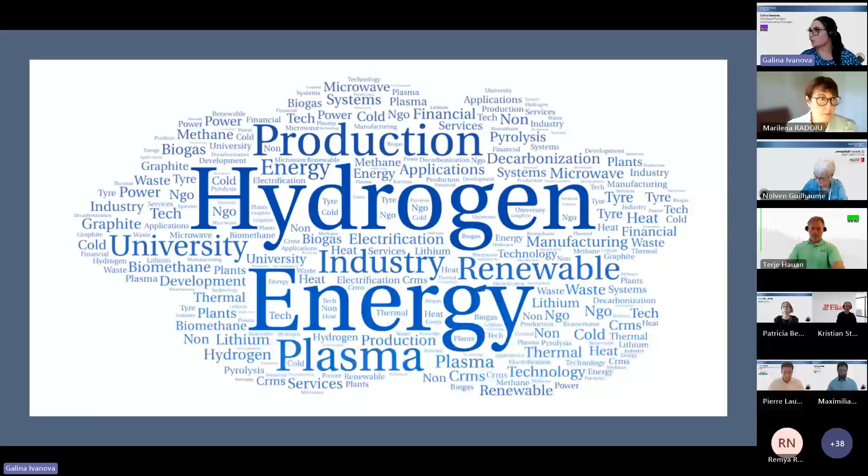In the registration form, we asked you to fill in your sector. So I created just a word cloud showing where people joining this webinar work in. So welcome to everybody. It's a joint effort. So we are happy to welcome people from actually all over the world. A lot of people from Europe, of course, because we are European projects, but also a lot of interest from Asia and United States, Canada, and South America. Which is very, very nice. We are very happy with this.

A quick look at the agenda. We will present the three projects, ColdSpark, Titan and Storming. We are all dealing with methane splitting in some or other way. We have Maximilian Kuhn from Hydrogen Europe who will set the scene. Thank you very much, Maximilian, for taking this responsibility and joining us today. And then we will have maybe the most interesting part with representatives of Michelin and Elkem, who will tell us why industry partners are interested in our projects. And we will finish with a panel discussion where we are also quite open to your questions too.

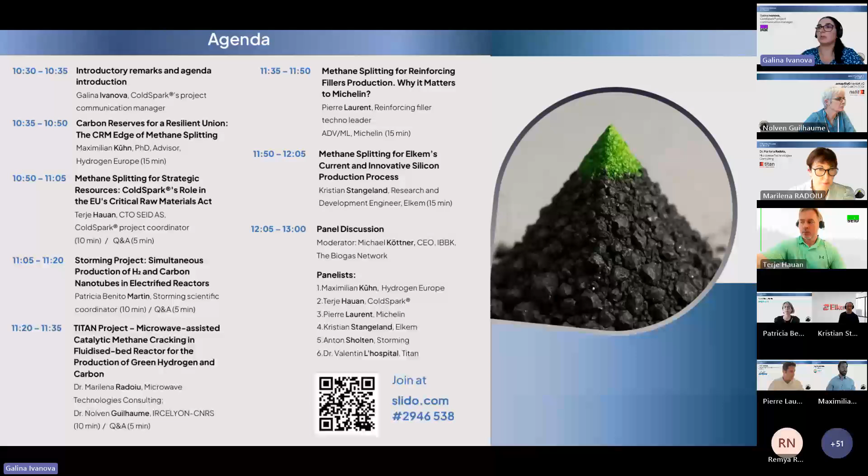And going back to the agenda, I give the floor to Maximilian, who will share the screen and tell us more about the carbon reserves for a resilient union. Thank you all.

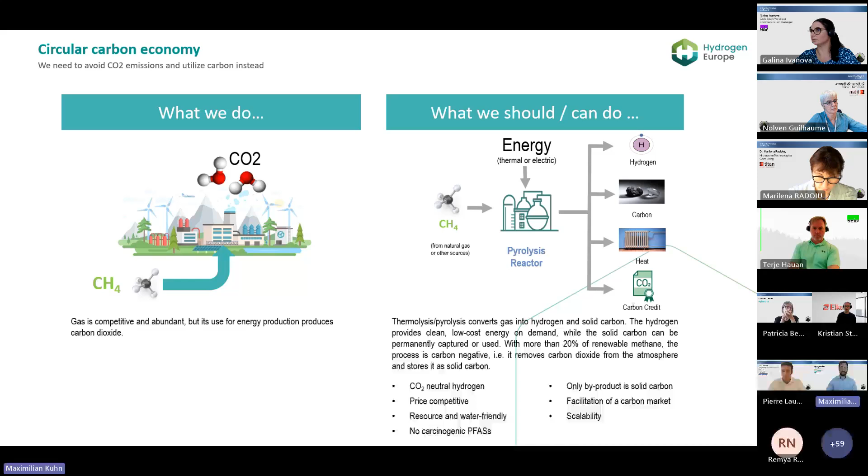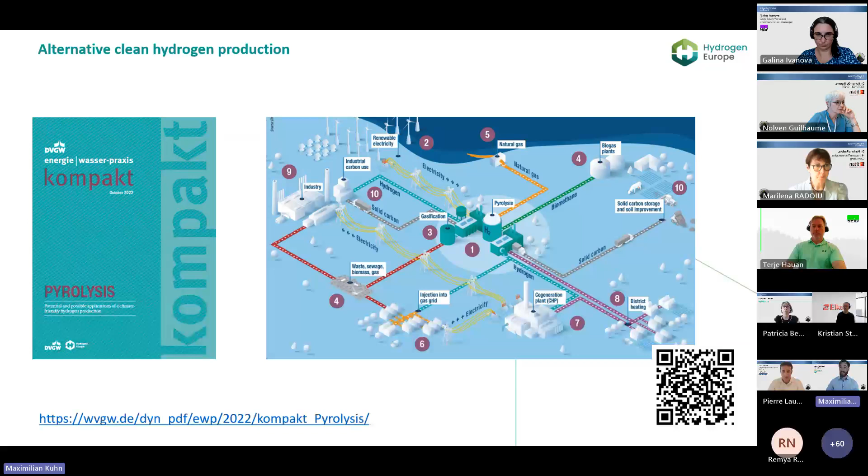So when we look at the system integration, we can see we have this gasification pyrolysis process in the middle. We can use existing infrastructure. We can integrate with biogas plants. We can integrate with municipal waste and industrial waste, and we integrate renewable electricity.

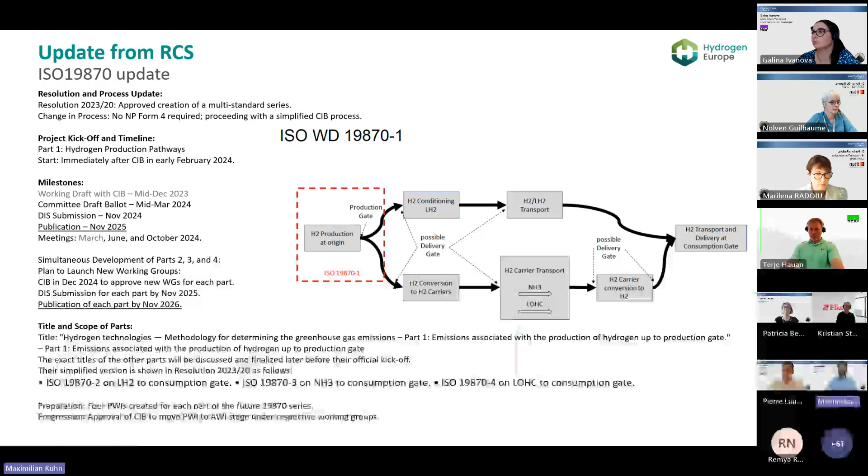I'll skip this slide. One of the works I'm doing is that we have been working on the ISO 19870 on the methodology for calculating the carbon footprint for hydrogen pathways, including in the annex for methane pyrolysis. This standard will be finalized over the summer and published towards the end of the year. So we have been working for more than 3 years, I think, on this, and now it's almost ready to go. So if you want to discuss this, feel free to reach out to me.

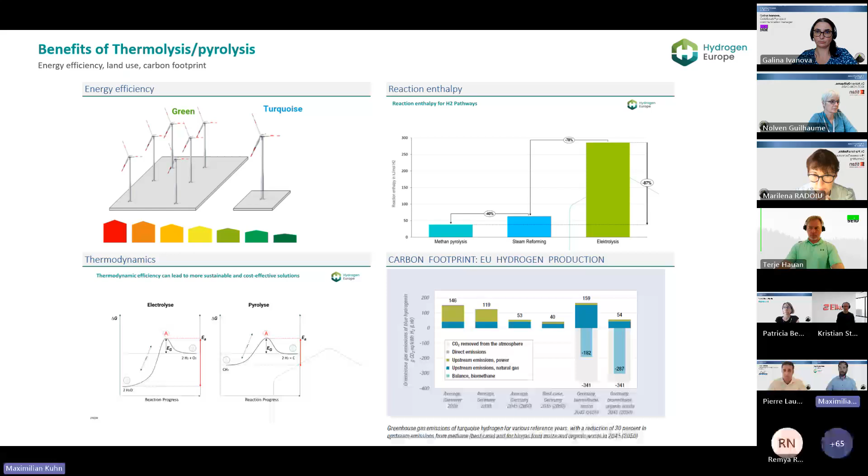When we look at the benefits of turquoise hydrogen or methane splitting, we see we need less energy to split. This is because of the reaction enthalpy. Splitting water is just more energy intensive than splitting the CH4. And another benefit is also the negative emissions. I pointed out this earlier. So it's one of the only technologies that can abate and generate negative emissions already with existing technology today. It also integrates very well with electrolysis and methanization.

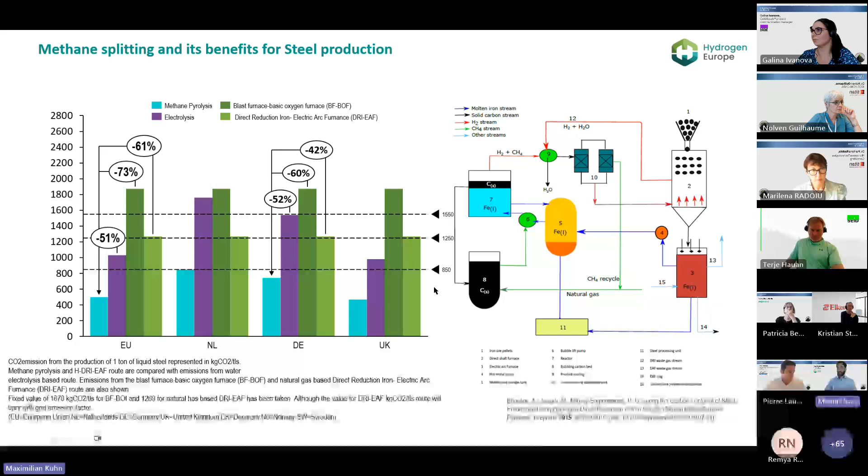Also in steel production, there have been some papers published on how that can be used and benefited in the process. And I think what this seminar is largely about is also the carbon, and we can see that the carbon can differentiate depending on the production process and the technology used, but overall carbon is a very, very valuable material. It enables a lot of industry applications. It enables faster, lighter, and stronger applications. And here we also see the advantages of solid carbon or graphite, depending on the production process.

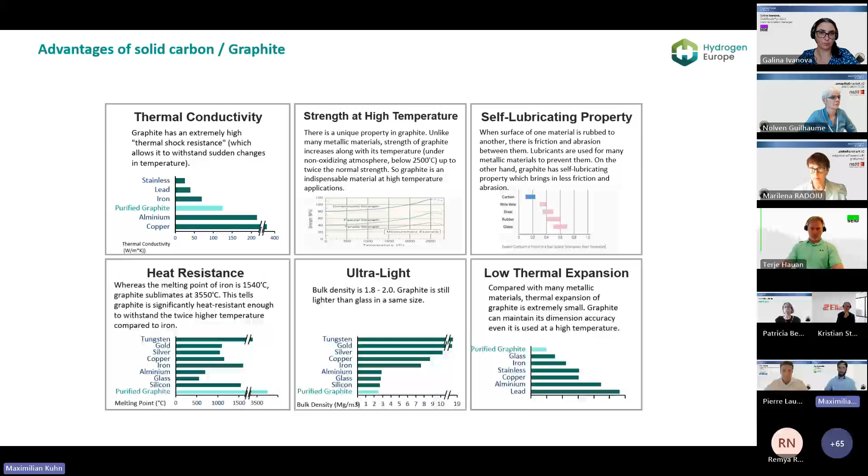As I said, we can see a lot of good qualities of this carbon, and that is very important, I think, for the resilience of Europe and the development of new technologies. Especially when we look at the carbon footprint of graphite produced in China, the dependency on the Chinese value chain is very high for Europe. And I think this is where we need to act now to become more resilient and independent. Also, IEA predicts a fast growth for this carbon market. So I think the discussion about these carbon markets is rather obsolete, because we can find a lot of applications.

Speaking about applications and historical examples, gypsum was an industrial byproduct from the steel production. Also here, a lot of people didn't have the vision or the idea where to use it. Now it's almost a scarce commodity. When I take the train from Brussels to Paris, I see these hills in the landscape. These are slag hills. Also here we have seen in the past where to use it.

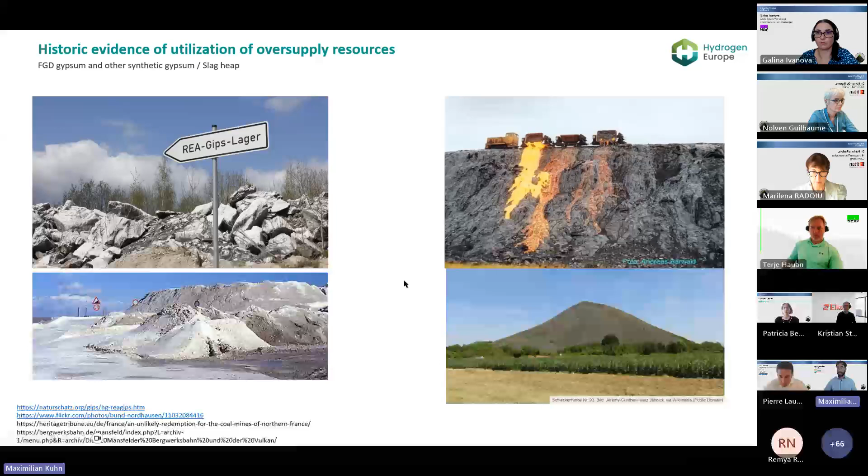But I wanted to say that for the solid carbon, we see a lot of applications, especially in all kinds of renewable green technologies, from wind energy, automotive, power, semiconductors, PV, aerospace, connective fibers, energy storage, and batteries. So in all these applications, carbon is being used, and it can be used in the future. Also, when being stored, we can see here the ratio where it can be stored. So there's plenty of options and storage space available, and storing solid carbon is much easier than CO2.

When we look at the global emissions, 20% of the global emissions come from a few processes, and these are mainly material processes. And I try to indicate with these black and white buttons where the carbon can be applied or integrated in the future. And you can see that almost 95% of all material uses can be, and these are generating 20% of the global emissions. So these can be mitigated in the future.

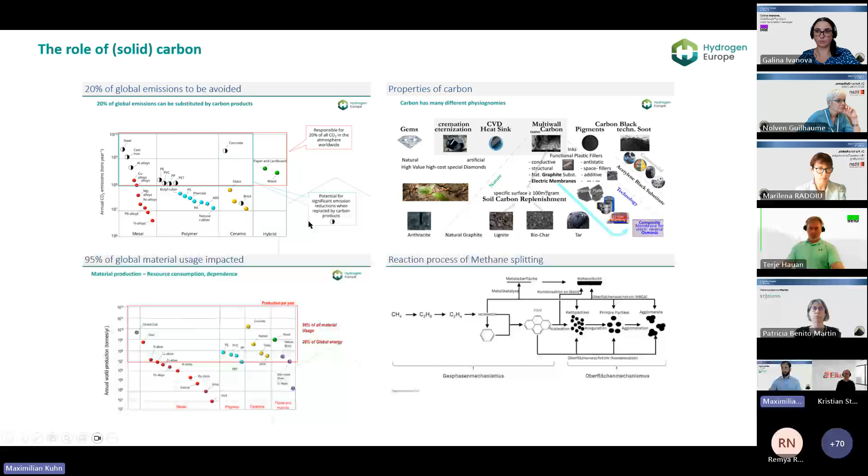So looking also at the European Commission agenda, I think also with the technologies available from the 1940s to 60s, we saw gasification and other technologies. So solid carbon can enable an oil and gas-free circular economy, potentially also substituting oil imports. When we look at graphite again, now we have more focus on resilience and defense. We see on the very high risk critical raw material, graphite ticks almost all the boxes in all kinds of sectors except missiles and torpedoes.

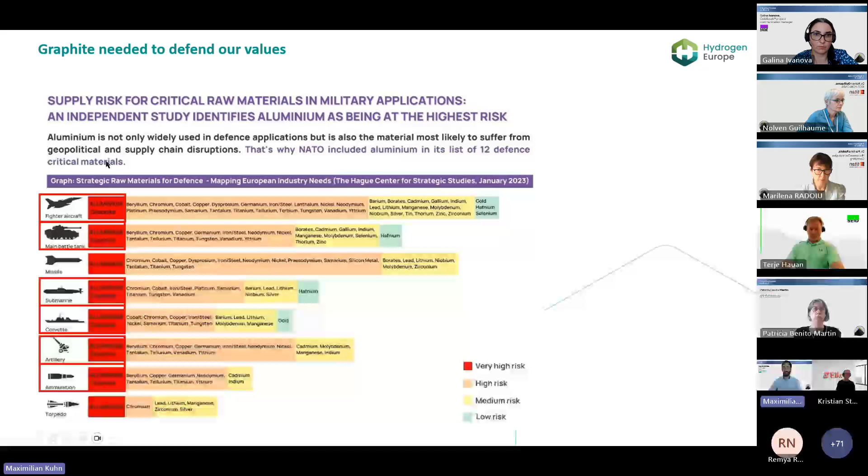When we apply solid carbon to concrete, it has very good advantages, and of course it also helps to store the carbon there for a very long time, which also then can help to generate carbon credits. Another very important part is food security.

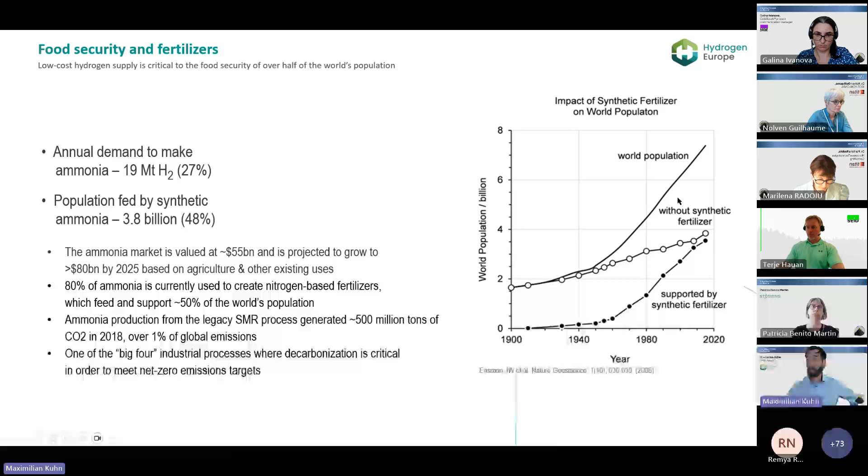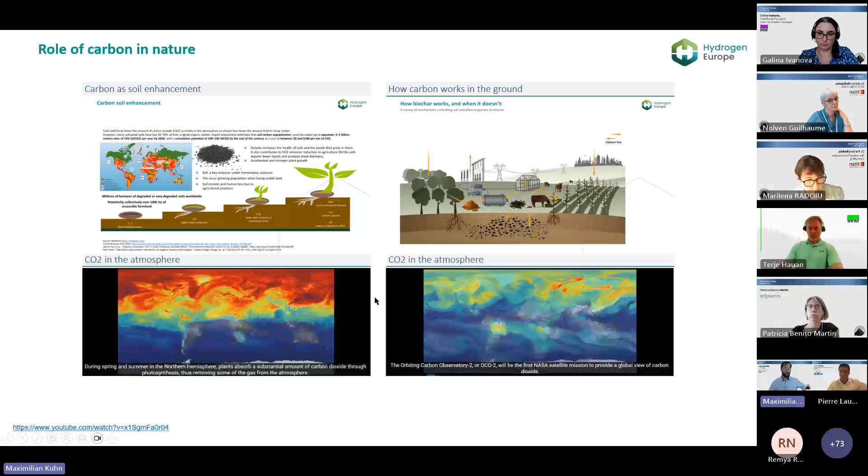So we can see that the plants are uptaking a lot of CO2, more than potentially direct air capture can do. So we follow the path of nature, and we can integrate the nature into our pathway by integrating biogenic methane into the production pathway. So we also see this in the RED methodology.

And with this, I'm also coming to the end of my presentation. So methane pyrolysis is key for the Green Deal. It enables the circular economy action and the energy transition. And I think most importantly, it can help avoid hydrogen transport. It can help avoid CCS problems. It can help avoid depreciation of assets, and it can mitigate immediately Scope 3 emissions today.

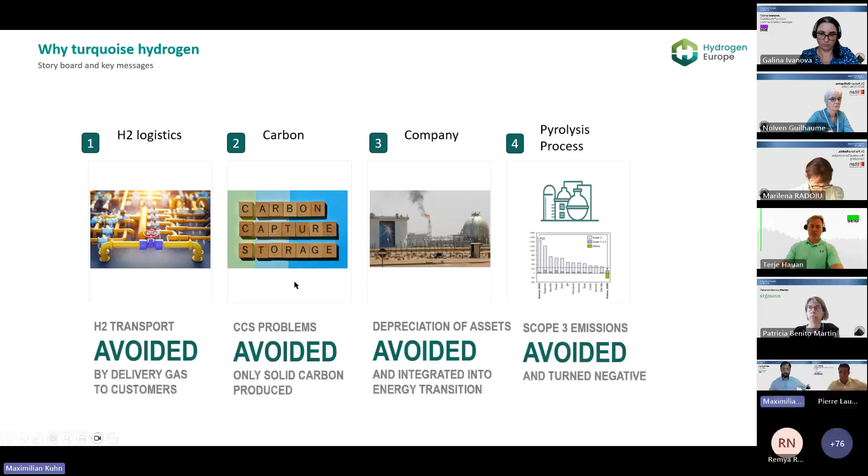With this, the Sustainable Development Goals here, methane pyrolysis applies to 13 out of 17 SDGs. And I think this is a very success story, and we should further help to push this in the right direction and enable these technologies to come to market, because they are desperately needed, and they're a big advantage of European technology, also manufacturing technology and engineering technology that is happening here in Europe, and where we're not depending on other regions. So it is a way to diversify and to integrate systems into the overall hydrogen economy.

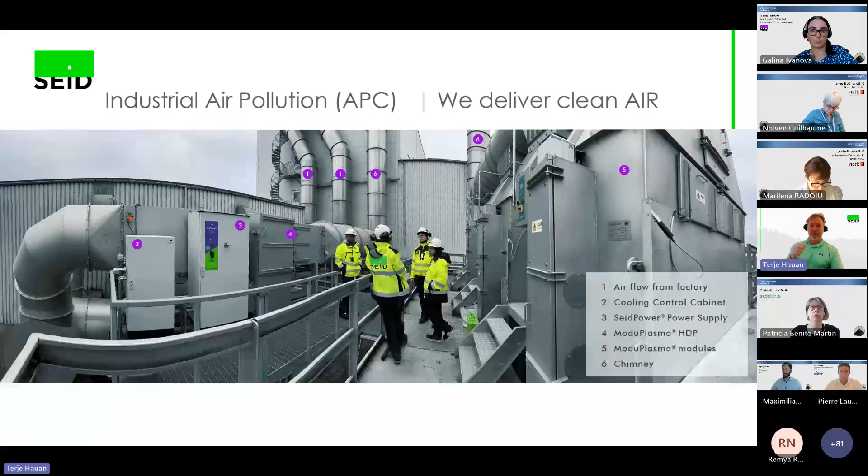So we have been using cold plasma, non-thermal plasma, for different kinds of air pollution for many, many years. And we have industrial large-scale systems, and we have them all over the world. Since 1997, we have delivered these systems to a lot of locations, a lot of tier 1 clients all around the world. So we are constantly evolving as a company.

During the past years, we also moved into the marine abatement sector. So now we are using the same type of technology to take away exhaust gas and particulate matter from large engine systems. We can do it on marine vessels, we can do it on a land-based facility, and so on. But in this case, we are providing the same as the last slides. It is a wet electrostatic precipitator, and it is an SMPS power system, which is then collecting what we call black carbon.

I want to emphasize, when you say black carbon, it's something unwanted, polluted, filled with something you don't want. If you change around from black carbon to carbon black, you have something entirely different, but it's all carbon-based materials.

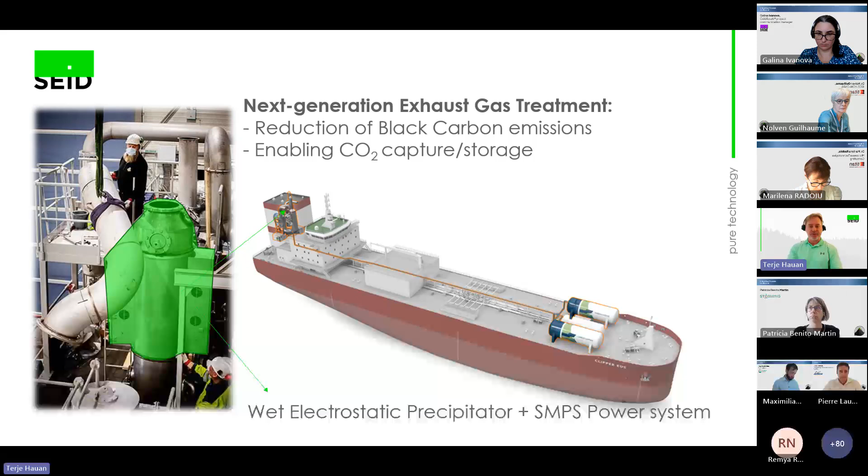So today, we are going from an existing technology and existing products, and we're moving that into a new area. When we talk about ColdSpark and the European Union grants, which we received in 2022, it is about building ColdSpark on the shoulders of what Seid has done for many, many years. But now we are using the technology not to reduce air pollution. We are using it as a platform to create clean and decarbonized hydrogen and elemental carbon from natural gas or biogas. As Maximilian said, this is a smart way of doing it. It's going to play an important role in decarbonization. So for us, it's the same technology, same components, same competency in the company, but a different application.

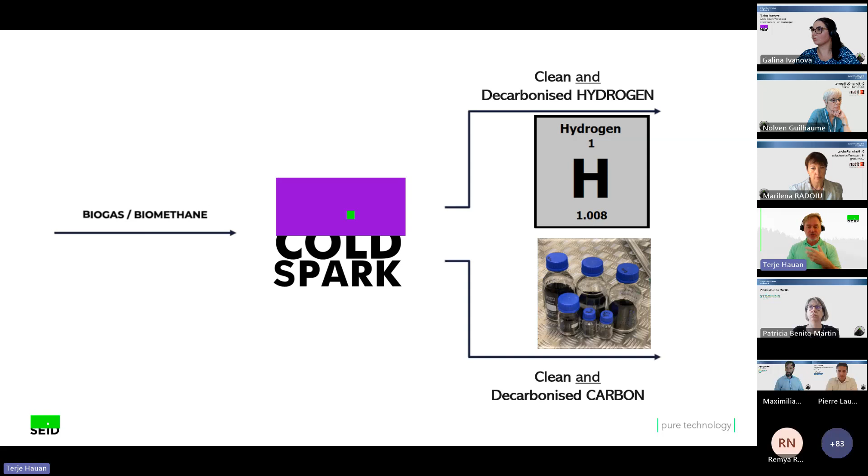Maximilian gave us a good overview, but I think we need to step two steps back and understand. So what is this technology? What is it doing? Basically, and that goes for us, for Titan and Storming and all the other 30 companies in methane splitting or pyrolysis, you take biogas, biomethane, you put it into a magical box, in our case called ColdSpark, and you produce clean and decarbonized hydrogen, and also clean and decarbonized carbon. Normally when the European Union talks about carbon, they actually mean CO2. We mean solid elemental carbon, and that's what you get. Just to make sure we are on the same page.

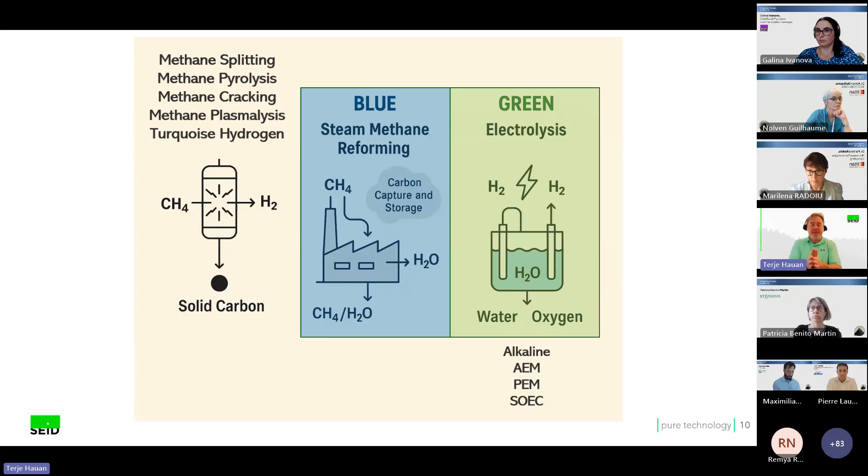We all heard about green hydrogen from electrolysis. We also heard about blue, which comes from steam methane reforming, or ATR. And as Maximilian mentioned, there's turquoise hydrogen or methane pyrolysis. This baby has a lot of different names based on each company's implementation. Just as for electrolyzers, you have alkaline, AEM, PEM, and solid oxide. The same happens for methane splitting. Companies could use methane pyrolysis, methane cracking, methane plasmolysis, turquoise hydrogen, and six other names. It's just a different way of using the technology.

But at the end of the day, it is about this unique possibility of producing both clean and decarbonized hydrogen, as well as a raw material which is part of the EU's new Critical Raw Materials Act: elemental or solid carbon in various types and configurations. So that's the basis of what we're doing. Again, I want to dive into this just to make sure you understand. I talked about how there are a lot of approaches in the market.

The main leader in this segment is Monolith Materials in the US. It used to be a Norwegian company, but it was taken over by Americans in 2012, 2013. So that's the basis for the majority of the other approaches, which is not us.

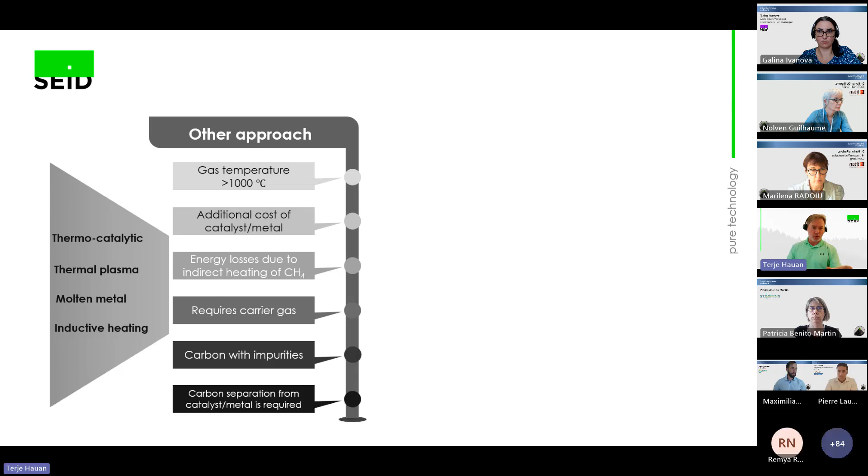High gas temperatures need a catalyst, have energy losses due to indirect heating, carrier gases involved, and carbon with impurities, often because of the catalyst, which then needs to be separated from the carbon. So those methods are often called thermocatalytic, thermal plasmas, molten metal plasma systems, or inductive heating. So you have a number of them.

The difference, and what we're trying to achieve with Seid, is based on our legacy and our background. We have a lower gas temperature, we don't need any catalyst in the process, we only rely on energetic electrons. So high temperature electrons, not high temperature plasma. And we have very high carbon purity because we don't need to separate the carbon from a catalyst. And we have a very, very fine tunability on the carbon morphology, whatever you want to do.

I think that was the reason why the European Union granted us a project together with Storming and Titan, which will share the details on what they're doing afterwards. So that's the basis for this. One of the key drivers has been our legacy, our industrial experience with non-thermal plasma industrial systems all over the world, which was a very important driver.

What Maximilian pointed to is a very, very important element here. A lot of people talk about green hydrogen, which is basically water electrolysis. We all need to understand that water is very difficult to get to the stage of hydrogen. You need to force water with a lot of electricity because of the bond energy of the molecule. When it comes to natural gas, or basically methane, which is the core component in natural gas, that is vice versa. The bond energy in methane is very favorable.

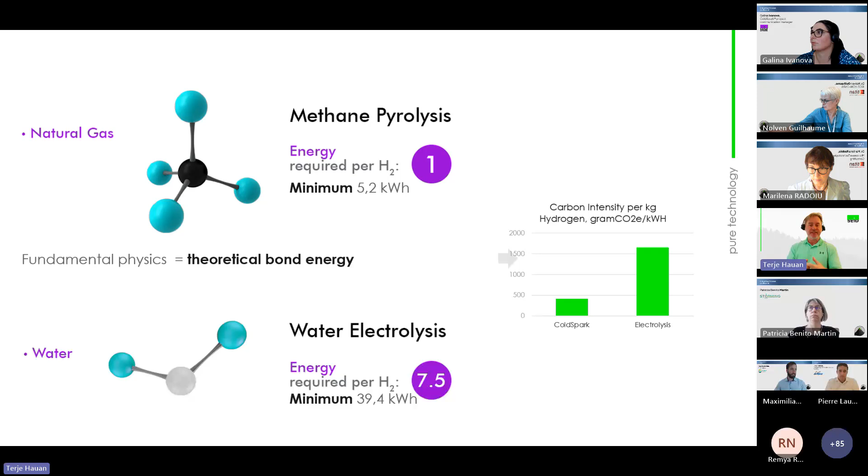This means you need a lot less added energy to release the hydrogen and carbon from the CH4 molecule. And that has a profound effect, which Maximilian also pointed out: if you use Norwegian natural gas together with electricity derived from hydropower in Norway, the carbon intensity of that hydrogen will actually be lower than producing the same hydrogen from hydropower in Norway and water. This is fundamental physics, it's not about electrolyzers or technology, it's fundamental physics.

So what we're trying to do, all of us working in the methane splitting, pyrolysis, or cracking industry, is to turn methane from a villain in the climate setting into a climate hero.

What you see on the left-hand side now is what we do today. We have a fossil fuel, a turbine, a compressor, a combustion process, and that forms CO2 in the process. Then we are forcing ourselves to do carbon capture and storage. That's a very expensive pathway, but it's the traditional one.

A lot of companies are saying, well, we can do CO2 splitting afterwards to make some sense of all the CO2. But that's very energetic and creates a lot of low value byproducts.

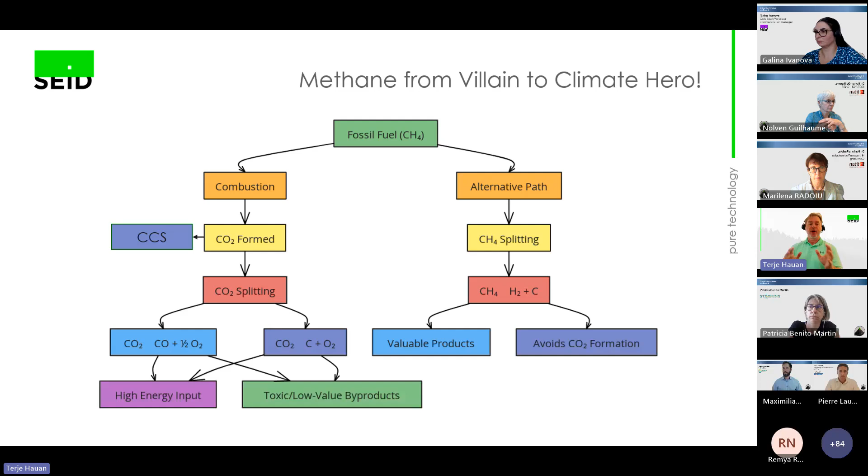So what we as an industry are suggesting is an alternative path, taking CH4 and splitting it into carbon, which is now a value, and hydrogen, which is still a value, so you have valuable products. You also avoid the formation of CO2, and you have permanently removed the CH4 from the equation as such.

So what is important about this? When we started the project a long time ago, a lot of focus was around the hydrogen, and of course clean and decarbonized hydrogen is very, very important. But what is even more important is EU policies, and now the Critical Raw Materials Act, which was recently implemented by the EU, is setting a focus on elemental carbon.

Most people, most investors, most engineers I talk to are not aware of the potential and the value of the carbon material. I have to admit, I did Photoshop the color here so that we don't produce any green elemental carbon, just to make a point of it. So this is a material which is of high value.

Maximilian went into it, so I will not dive into it.

One of the key areas where you see the value of this elemental carbon is when you add this material into thermal energy storage systems - they improve immensely. There's a lot of potential to use this carbon material in thermal energy storage. One of the key issues: you can actually heat the system up to 2000 or 2500 degrees, which is something you cannot do when you heat up sand or salt.

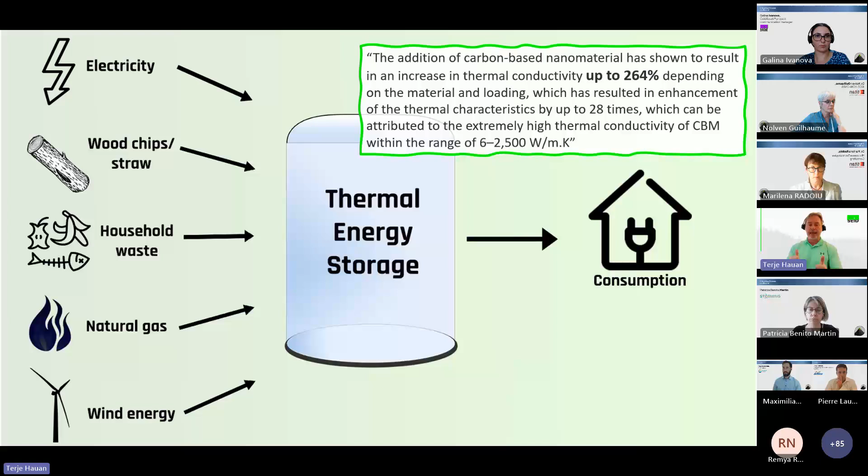Another area, also alluded to by Maximilian, is the potential of adding this as a filler material to concrete and cement, and even replacing steel rebar systems with inert carbon structures. They are lighter, stronger, cheaper, and they do not rust.

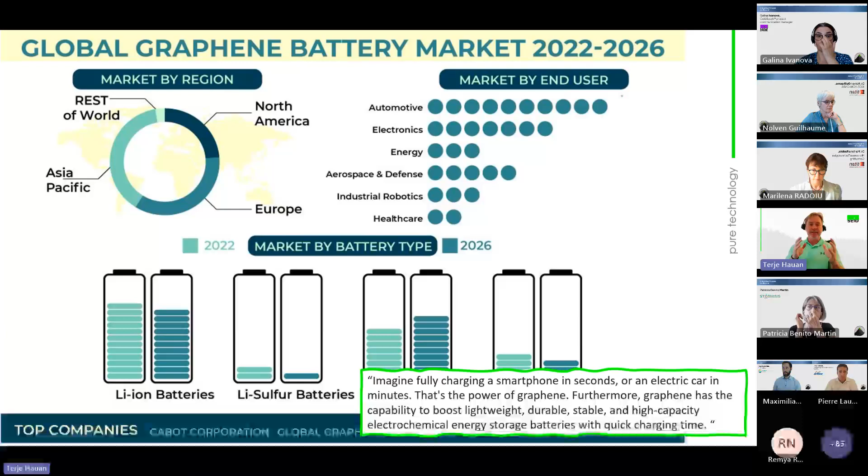Of course, the obvious one is using this carbon material inside the battery industry, which requires this type of material - whether it's graphene-based materials or hard carbon. There's immense potential in these industries.

And of course, you can talk about graphene oxide membranes. It's very, very important when it comes to water purification.

What we already see in the US: there's a US company called Modern Hydrogen which is now producing graphene-enhanced asphalt, showing immense potential because it makes the asphalt last much longer and with higher quality than conventional asphalt products.

And of course we also see this huge drive inside what we call carbon black, used in tires. We have a company which will explain more about this in the future. This is very important because today we get this carbon either coke-derived, coal-derived, or from refineries, which is not something we want to do for the future.

And of course, the obvious one is the steel industry. So that's a huge potential in itself as part of decarbonization, both with the carbon and with the decarbonized hydrogen. Just to understand, we don't care as a company, as a technology provider, whether the methane comes from biogas - fantastic.

Then you have carbon negative. So just to understand, if we take the methane from a biogas facility, we will have carbon negative hydrogen and carbon negative carbon. So this is an interesting exercise in itself.

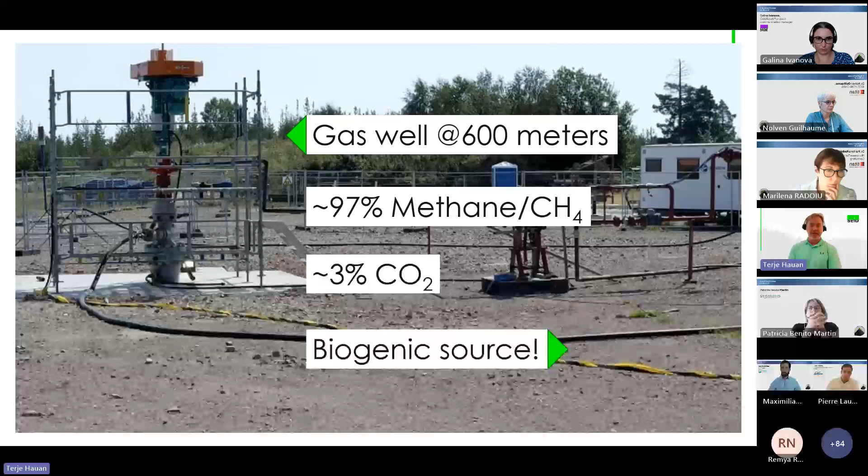But we are also working with natural gas. This is a project we are doing in Scandinavia, where we can access natural gas from only 600 meters, land-based, with no fracking involved whatsoever. These wells are producing up to 97% methane, and those are actually deemed as biogenic resources, which means, again, it will be carbon negative.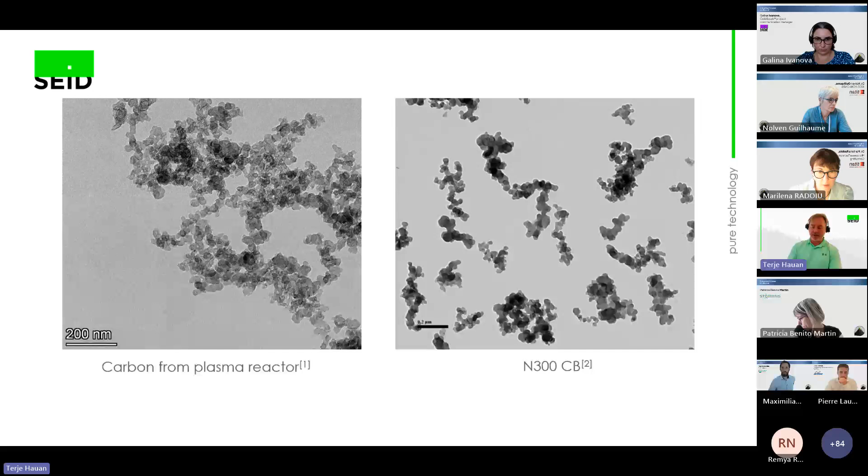This system is based on what we have downstairs in our own lab, and this is what we are scaling up further. We also applied for additional grants from the Clean Hydrogen Partnerships later this year.

I'll save the questions for the panel discussions and also for the Slido, but that ends my presentation. So thank you for listening.

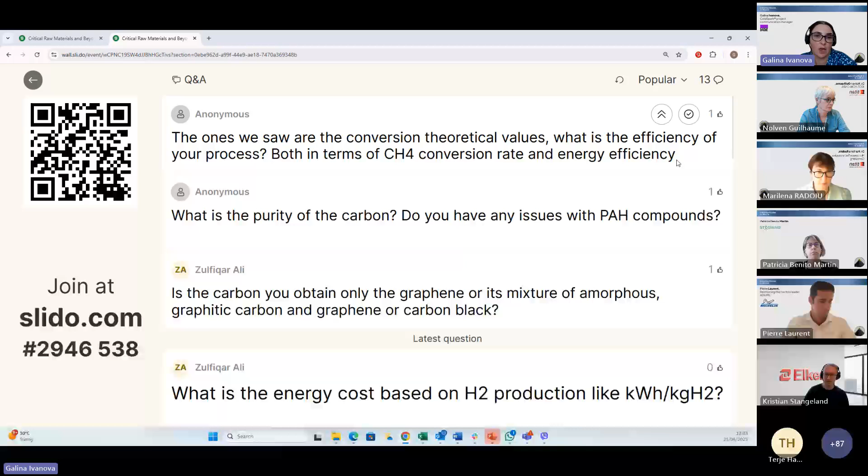I believe this is for Terje. Terje, are you here? Hello? Yes, back again. Do you hear us?

We just had a question, this one: the ones we saw are the conversion theoretical values. What is the efficiency of your process? I believe this is for ColdSpark, both in terms of CH4 conversion rate and energy efficiency.

So what we're seeing here depends on what you want from types of carbon qualities. If you want specific qualities versus an out-of-the-box system, it's ranging in our system, without any catalyst elements involved, 10 to 12, 13 kilowatt hours, depending on what we want to achieve. So 10 to 12 kilowatt hours per 1 kilogram of hydrogen, that's 3 kilograms of carbon. And then the second part is, of course, how you want to use the carbon, which could add additional cost to the system. But that's the first one.

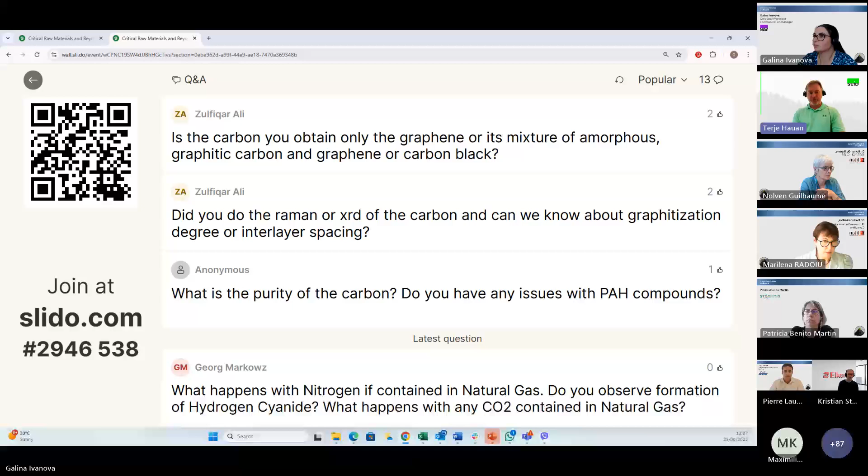The carbon, we see both graphene mixtures and we see amorphous structures, and we see graphitic, all of these depending on the settings in the reactor system, so basically how you tune the power system. It's based on pulse amplitudes, pulse width, pulse duration, energy in each pulse, and so on.

Yes, we have a lot of TEM and SEM analysis, and we have done Raman as well. This presentation, we don't have the time for this at this point in time. More than happy to have those conversations.

Operational pressures, we are looking at less than 3 bar in the system. On the compression side, we haven't included that in the balance because the majority of our clients are not looking for fuel cell quality at 350 or 700 bar. The majority of the clients we are talking to are happy actually with hythane, basically a combination of hydrogen and methane in the same mix. So they don't question us about the compression part.

So the purity depends on how much energy you want to dictate to the methane, because if you include other gases into the system, they will steal energy. CO2, for example, will steal energy from the methane. So high quality 99% methane will have a higher efficiency than having other gases, because CO2 will only steal away energy from the methane. Natural nitrogen in the natural gas, we are taking that away together with H2S in a pre-treatment stage.

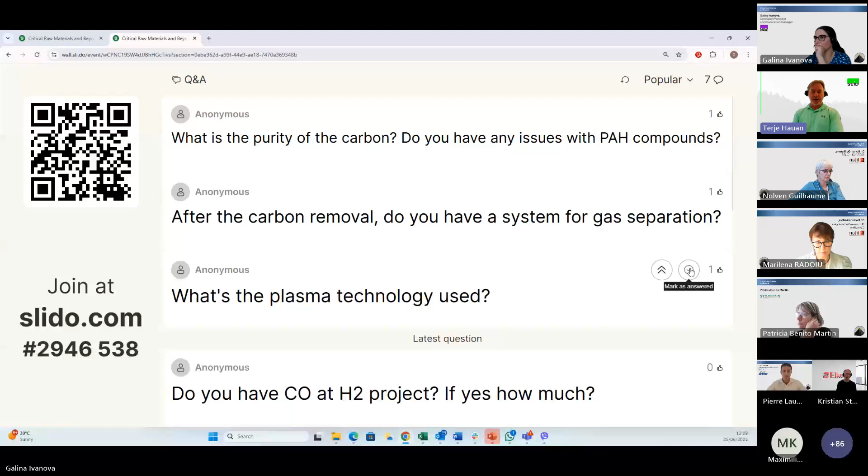So the purity, I'm not discussing the purity of H2 because H2 is secondary. We are looking more or less at the valuation of the elemental carbon. So the purity of the H2 stream is decided by the industrial application. If you want to use it for fuel cells, you will need 99.999, and that's not our technology. That's commercially available products which can do that. There's no CO in the product, because we don't have it.

Anonymous is asking a lot of questions, so I think I will pass Anonymous. Until Anonymous becomes a real name, I will not answer any other questions from Anonymous.

There is some deposition, but it's minor, so it is not causing any large amounts of carbon to disrupt the production of the system. These are minute depositions which will remain minute over time.

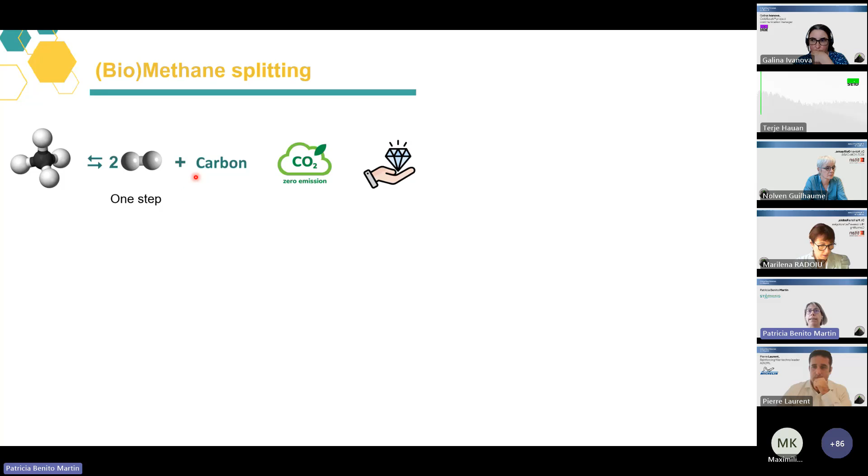You have already heard about this, it has been very well explained before. The advantages of methane splitting, or biomethane splitting when we are using biogas, are that we are able to capture the CO2 emissions because we are forming a solid instead of a gas, and the added value. But this added value will depend on the type of carbon. It has been seen before that we can obtain carbon black, but also graphene, carbon nanotubes, and graphite.

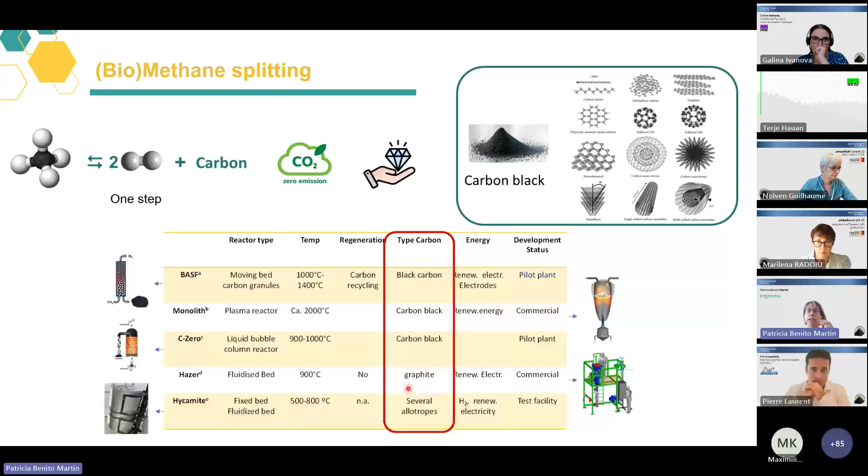At the moment that we applied for this proposal, that was more or less the situation at high TRL. We had plasma technologies that, as said before, have the advantage that we don't need to separate the carbon from the catalyst. And there were some catalytic processes such as Hazer and Hycamite. The advantage of using a catalyst is that the catalyst itself is able to control the nucleation and the growth of carbon. So we are able to tailor the type of carbonaceous materials that we can produce. This will depend on the catalyst, but also on the reaction conditions.

So for instance, using carbon black, it's possible to produce graphite, but if we move to nickel or iron or even cobalt, we can produce carbon nanotubes. So methane splitting has a lot of advantages, but it also has some drawbacks, mainly for the catalytic part, that have prevented its deployment. Carbon, being the added-value product, may also cause the deactivation of the catalytic sites. So our catalyst will stop working and the reaction will stop, and we can have clogging of the reactor because of the generation of a solid inside a tube.

Moreover, as has been said before, this reaction is less endothermic than steam methane reforming, but still, to have high yields, we need to go to temperatures above 700 or 600 degrees C. So heat transfer is a very important point. Just remember that steam methane reforming is a highly CO2-emitting process, but this is also related to the generation of the heat required to perform the reaction.

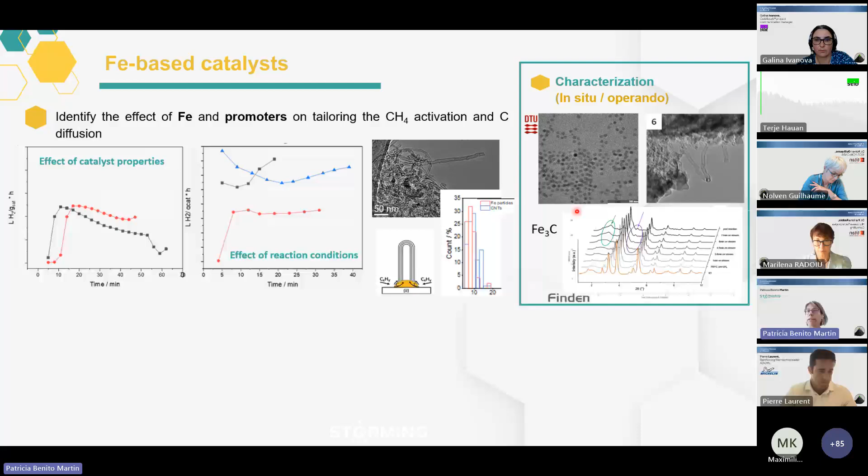We achieved the results by combining experimental catalytic tests with in situ and operando characterization that allowed us to confirm the base growth mechanism with some in situ TEM videos. But also very important was the characterization, for instance by XRD, that confirmed that the only active phase is iron carbide. So if we want to produce good carbon nanotubes, our active phase is only iron carbide and not metallic iron.

For moving from the laboratory to the TRL5 reactor, we have also been using multi-scale modeling, starting from atomistic modeling by DFT and molecular dynamics that confirmed that iron carbide is the best active phase. We performed some kinetics and microkinetics, and finally computational fluid dynamics that allowed us to improve the geometry of the catalyst. What is this geometry?

The results I showed you before were performed with powder catalyst, with pellets, but our aim was to achieve structured materials. These 3D materials have an advanced design, easy production, and high adaptation, because we are combining additive manufacturing guided by computational fluid dynamics. Our aim was to modify or combine geometry and composition to control the heating, decrease the pressure drop, so we are able to keep the pressure low even while producing carbon, and increase the heat and mass transfer, important for this endothermic reaction, the mechanical stability, and finally the activity.

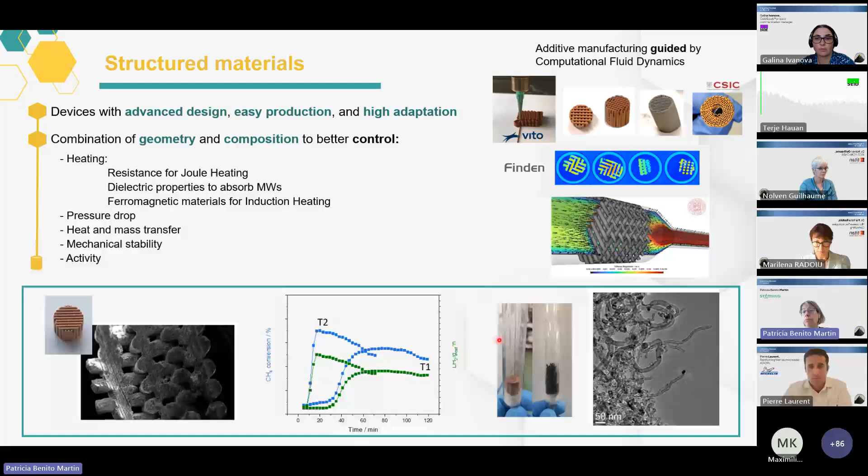How do we tackle the heat transfer? We are using electrified reactors, and in particular we propose 3 complementary structured catalytic reactors that can be powered by renewable energy. So we have 2 different reactor configurations: one fixed bed heated by Joule heating, and 2 fluidized beds with microwaves and induction. As you may know, every type of heating is based on a different phenomenon.

So we need a resistive material to generate the heat in the Joule heating by passing a current. We need dielectric materials in the microwave heating, and ferromagnetic materials in the induction. But whatever the type of heating, we have the advantage that we are directly heating the catalyst. This means that we are decreasing temperature gradients and heating losses, and in the end it increases the efficiency. And one advantage of this type of heating is that it is very, very fast.

For instance, if you have a look at this slide where I show you some results that we obtained with the Joule heated reactor using 3D printed structured catalyst, you can see that we can reach 700 degrees C in less than 20 minutes, and we can keep the temperature constant for the time that we want. This heating ramp can be changed depending on the power supply. It can be shorter or longer, depending on what we want to do.

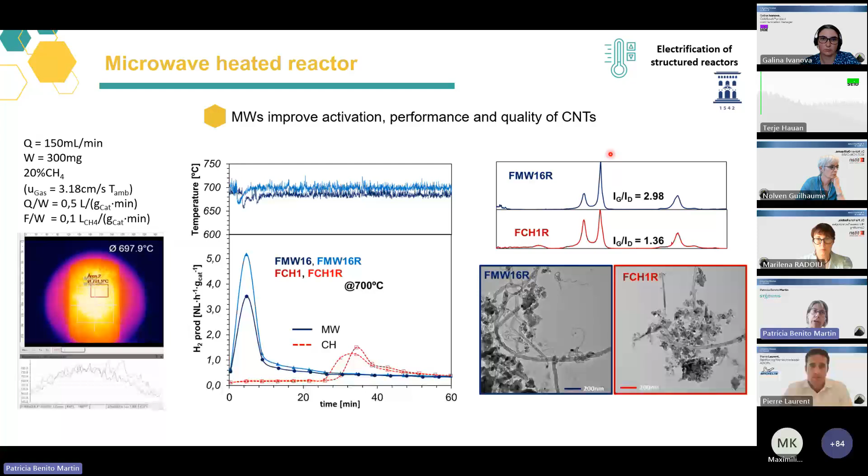The microwave heating reactor was applied before to a fluidized bed, but it can also be applied to a structured reactor whenever the support is able to be heated, such as in the case of this silicon carbide monolith that was coated by iron catalyst prepared by a mechanosynthesis method. Again, the temperature is quite constant, and the carbon nanotubes are still observed.

Finally, we added to the original technologies of STORMING, which were the Joule heating and the microwave heating, a third one: the induction heated reactor. In this case, the composition of the catalyst is not only iron, because the catalyst should be magnetic, should be ferromagnetic, so it was required to include cobalt and nickel. The advantage of including cobalt and nickel is that you can decrease the temperature.

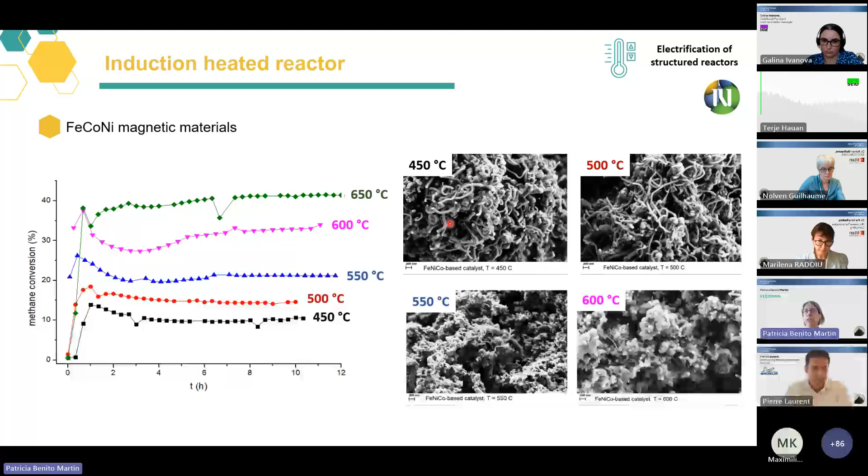Indeed, you can see that the catalysts are stable and active from 450 degrees C, and here the activity is measured up to 650 degrees C. And as you can see, they are very, very stable with time on stream. Here the scale is 12 hours. The properties of the carbon depend on the temperature, so increasing the temperature, the diameter and the size of the carbon nanotubes are decreased.

Currently we are working on the TRL5 prototype, but in STORMING we also focus on the whole process development, starting from the purification and separation of the biogas to produce methane that doesn't contain H2S, because it can deactivate the catalyst, and also the purification of the hydrogen, so we can produce hydrogen for whatever application, because we are using pressure swing adsorption.

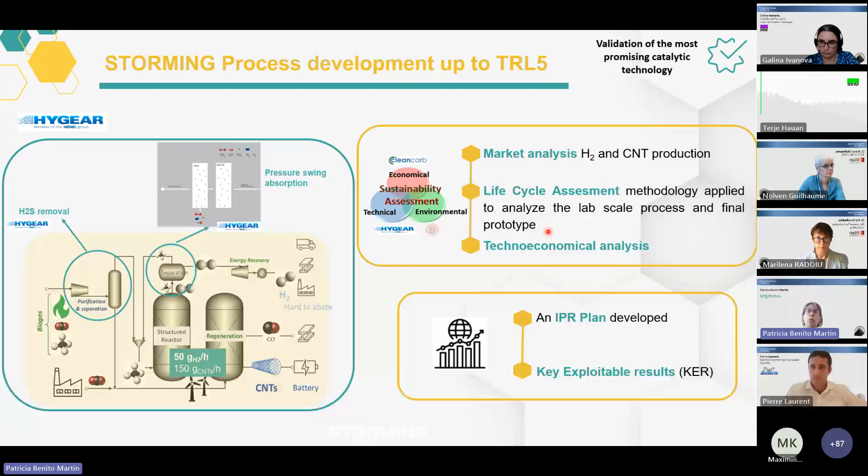We have performed a life cycle assessment of the methodology, starting from the lab scale processes, which was very useful to get the best results, also in terms of environmental issues. And we are doing so for the final prototype. We have compared our technology with a market analysis, and we have performed a techno-economic analysis that indicated that the technology is competitive with water electrolysis, with steam methane reforming coupled with CCS, and even with steam methane reforming. The price of the hydrogen will surely depend on the price at which we can sell our carbon nanotubes, because they can have a very high added value.

What are the impacts of our technologies? We are switching to renewable energy in comparison with conventional steam methane reforming, because it can be electrified. We are improving energy efficiency and selectivity. We are producing only hydrogen. I didn't mention it before, but at the outlet of the reactor, we only have methane and hydrogen.

And this improved energy efficiency is due to the direct heating of the catalyst. We can accurately control the temperature and operate at temperatures that are below 800 degrees C. Using structured catalysts, we can do process intensification. That means small reactors that can operate under transient conditions that can be determined by the supply, that can be either fixed or renewable energy, or the demand requirements, as I will show you later.

We are avoiding greenhouse gas emissions because we don't have carbon as a gas, but as a solid, and we are avoiding burners that also produce NOx. And as I told you before, we can decrease the cost in comparison with steam methane reforming plus CCS.

What are the applications of the hydrogen and the carbon nanotubes that we are producing? Our technology is thought to be a small, medium scale technology that can be located directly at the consumer, so we can avoid hydrogen transport cost and emissions.

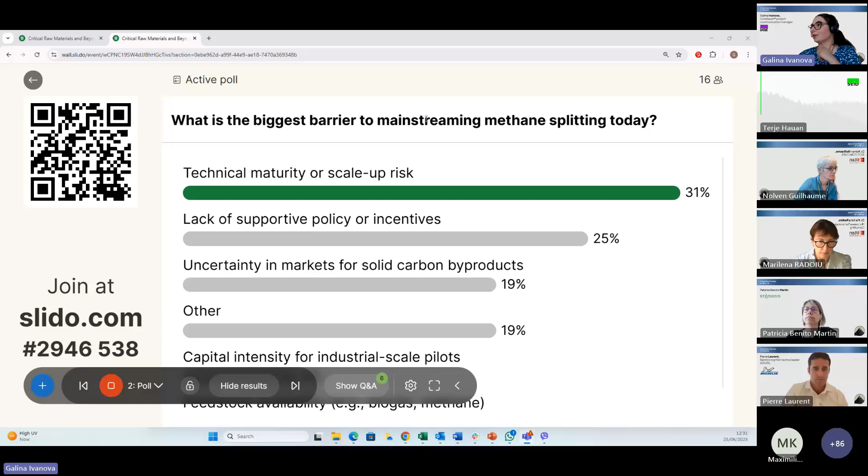Thank you so much, Patricia. We are having a look at the poll, the biggest barrier to mainstreaming methane splitting today. The winner is technical maturity, which is quite understandable because all of us are research projects. Although we have good data so far, we are still at risk, let's say. So going to the Q&A, I would just ask you to be fast because we are already slightly behind schedule, starting with the questions with more votes.

Yeah. Okay, so maybe if I can start. I want to read them, okay, just to save time. May I start? Yeah.

Okay, yes, so the methane conversion decreases sometimes over time. It can be related to catalyst deactivation, for sure; we have a catalyst that sooner or later will deactivate. Indeed, I didn't show this result, but we are working on the regeneration. What is the maximum conversion that we can reach? Up to 70–75%, depending on the reaction conditions, always working below 800 degrees C.

But what we usually give as a number is the hydrogen productivity, so maybe 15 liters of hydrogen per gram of catalyst per hour. How long the catalyst remains active depends. For instance, I showed you some results in induction heating where it can remain stable for 12 hours. And in some of the tests that we have performed in the fixed bed, the deactivation is just because we are clogging the reactor.

The size of the iron particle I showed you in the slide fits quite well with the size of the carbon nanotubes. We produce mainly multi-wall carbon nanotubes, but in some cases we have observed also single-wall carbon nanotubes. The length, I don't remember exactly the value, sorry.

To use it in heavy industry plants, what we are thinking is a modular technology. So this technology we are developing right now at TRL5 with one tube, but this technology can be scaled up, increasing the number of tubes. That actually is how steam reforming works, it is a multitubular technology.

The diameter of the nanotube decreased with an increase in the temperature. This can be related to nucleation and growth. So if you favor nucleation, you will produce smaller carbon nanotubes.

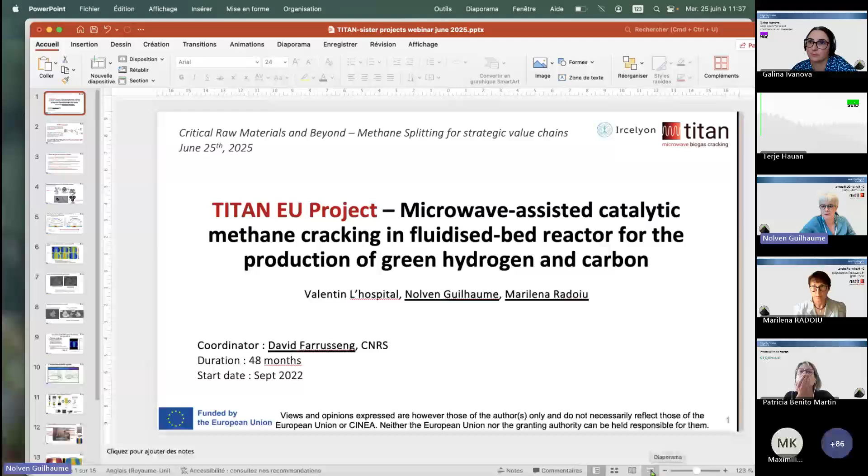Many thanks to our Storming partners. It's quite interesting, and without delay, we should go to Titan. Nolven, can you please share the screen? Yeah. Can you see my screen? Yes. Okay. Just go to presenter mode. Is it in presenter mode now? No, not yet. Ah, here it is. No, that's the wrong window. That is your window, and is it correct now? Yeah. Perfect. Thank you.

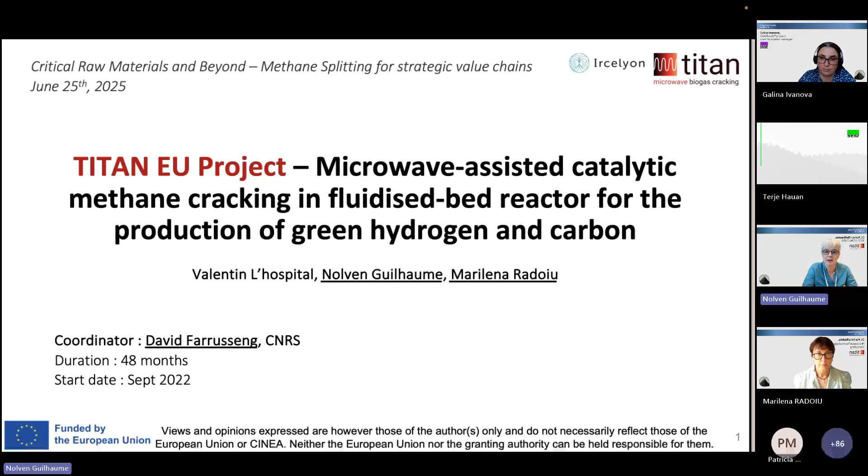So good morning, and thank you for the opportunity of presenting our Titan project, which has a lot of similarities with Storming, I have seen. So we are working on the microwave catalytic reactor for methane cracking and biogas cracking as well, for the production of hydrogen. The title involves green hydrogen, but we should have said maybe more turquoise hydrogen, and solid carbon. The project coordinator is David Farrusseng, who could not participate today. I will do part of the presentation, and my colleague Marilena Radoiu will do the second part.

So in our project, we want to develop a microwave heated catalytic reactor in order to convert biogas into hydrogen, of course, without emissions of greenhouse gases. We want to obtain pure hydrogen with a competitive price for the European market, and also to give opportunities of development for the biogas industry. The idea in the Titan project is to use our carbons in agriculture for soil amendments, and we have also a partner who is studying the possibility of using them for silicon carbide production.

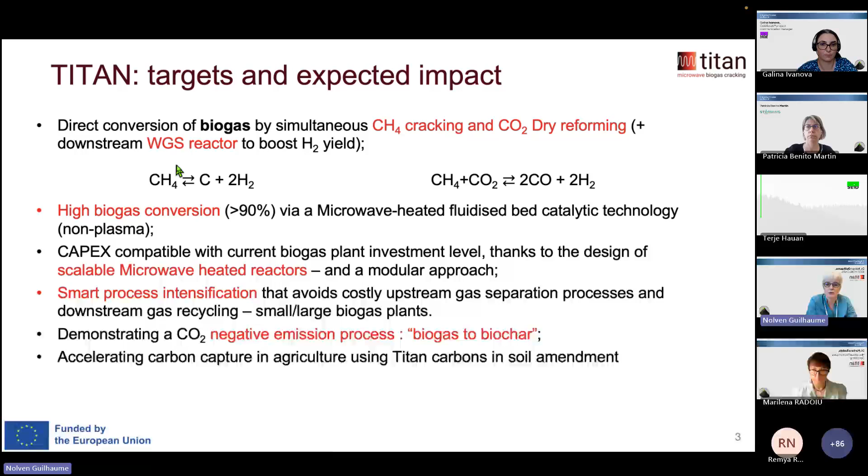The targets in Titan are the direct conversion of biogas by simultaneous methane cracking and carbon dioxide dry reforming of methane. We want to obtain higher biogas conversions, and we want to apply a microwave heated reactor, because this project is in the framework of the development of electrified reactors of the European Commission. This is the argument of the project. We want to demonstrate possibly a CO2 negative emission process by converting biogas into biochar, and accelerate carbon capture in agriculture. So we have been developing a microwave heatable reactor and, of course, catalyst for methane and biogas cracking.

And similarly to Storming, we finally found that iron-based catalysts were the most appropriate catalyst. So we synthesize them from iron powder, which is very cheap, a thin iron powder. This catalyst must be fluidizable, so we have a small particle size. The iron is a good susceptor to microwave heating. And by treating this catalyst under methane at high temperature, we cover it with layers of carbon.

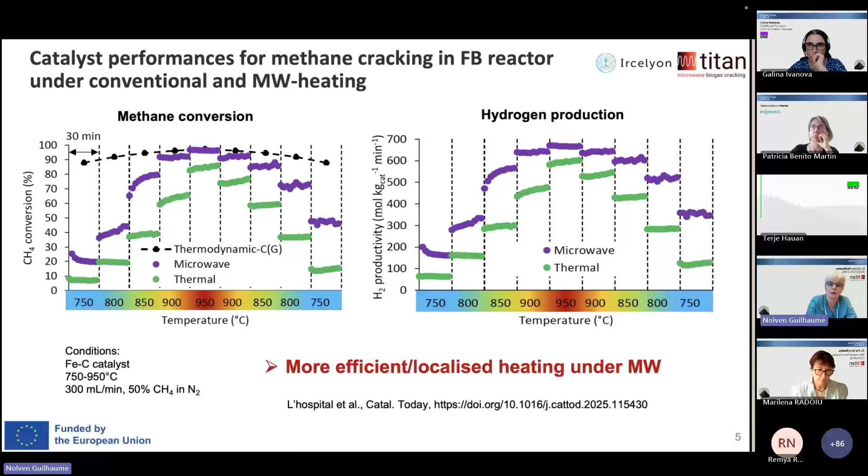You can find more details in the paper, which is indicated there, which has just been put online on the Elsevier website. So we can have a look.

So we have looked in more detail at the nature of carbon deposits on our catalyst. On the left, this is the same image of a fresh catalyst. We see it is covered with graphitic carbon platelets. After the catalytic reaction, we have much more carbon added on top of this. We have indeed carbon filaments.

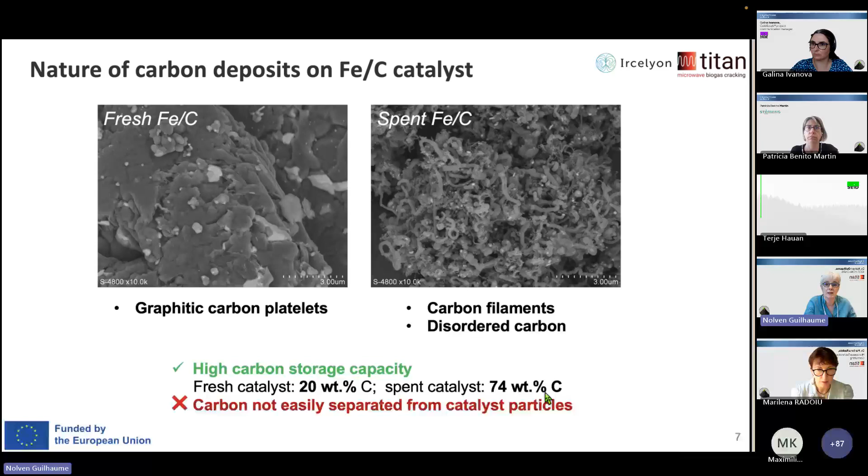So I will leave now, I will let my colleague Marilena talk about the scale-up of the microwave reactor technology.

Thank you, Nolven. So in terms of the scaling up of this microwave reactor technology, I just wanted to remind you that we started at TRL3, and by the end of the project, which is going to be in about 16 months from now, we need to arrive at TRL5.

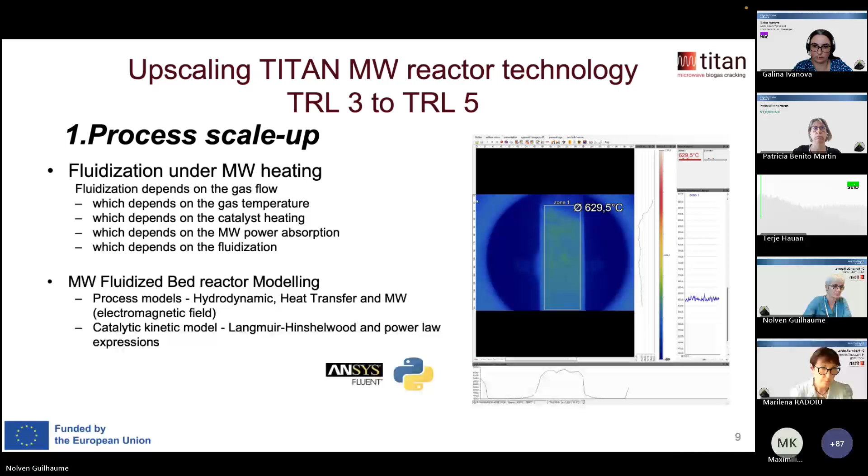And in terms of the second step is obviously the equipment and the test bench upgrade, so the scaling up. And in order to do this, we started by performing obviously a risk analysis. We are working with gases that are highly explosive and also with potential products that could be toxic. So we've done the risk analysis using the failure mode and effects analysis method, that helped us to decide what the main components of the TRL5 test bench would be. Next, please.

So some of these components are here. I'm not going to insist on all of these, working with these gases. Once again, we have to be in an ATEX zone. We also have to have all the interlocks for safety related to any potential carbon monoxide formation and leakage, microwave leakage, etc. I'm not going to insist, but happy to answer any questions.

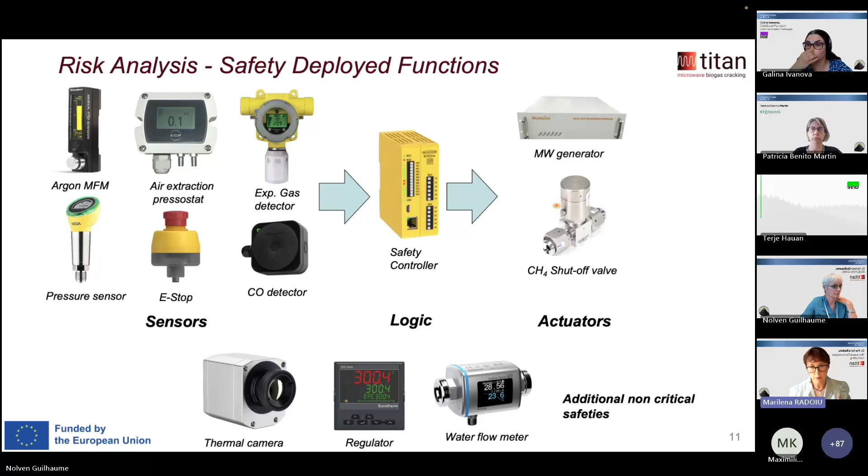In terms of process control, we also do thermal imaging and control the temperature of the reaction using temperature and microwave power. I will go back to this later, but next slide please, Nolven.

It contains a solid state generator for our experiments. It's a 2.5 kilowatt microwave generator, and at this testing scale, what's important is the control of the energy, the precision of control of the energy. Then the microwave line, a standard microwave line containing impedance tuners. They are manual impedance tuners.

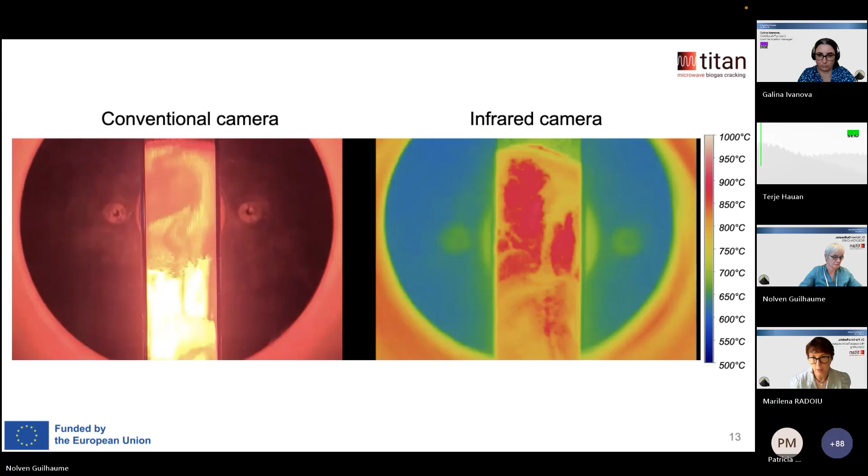Would you like to finish, or shall I? Well, as you want, I can finish because I wrote the conclusion. So thank you, Marilena.

Up to now, we started this project in September 2022, similarly to Storming, but we have one more year because this is a 48 month project. So currently we are at month 33. What we could achieve and show is that microwave heating combined with fluidized bed technology gives a very efficient reactor for methane and biogas cracking.

We can heat the catalyst very rapidly at high temperature. The catalyst bed temperature is homogeneous, and we produce pure hydrogen, at least from methane. There are no hydrocarbons associated.

We scaled up this reactor. We started with a lab scale reactor, and now we are working to have the TRL5 reactor running. We also have partners who I didn't have time to mention too much about their studies, because they also work on life cycle assessment and techno-economical studies, and they assess the process for small and large biogas production plants.

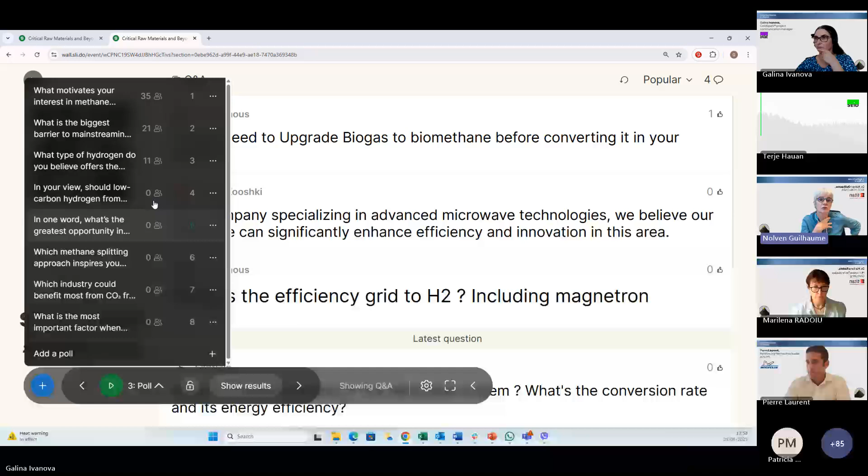To remove pollutants, if there is sulfur or other pollutants, yes. But the objective is to use biogas directly, which means also CO2. So we have been working on it, but it's different from methane splitting, just because we have CO2, and as I showed, CO2 can also gasify the carbon. So we can accept a certain amount of CO2 in methane, it works well. But as soon as the CO2 concentration increases higher to 10 or 15%, we start to have a lot of carbon gasification, so we lose solid carbon.

Thank you, if possible please just answer the rest of the questions in the chat. A quick look at our active poll about the type of hydrogen that our participants expect will offer the best balance by 2030: it's low carbon hydrogen.

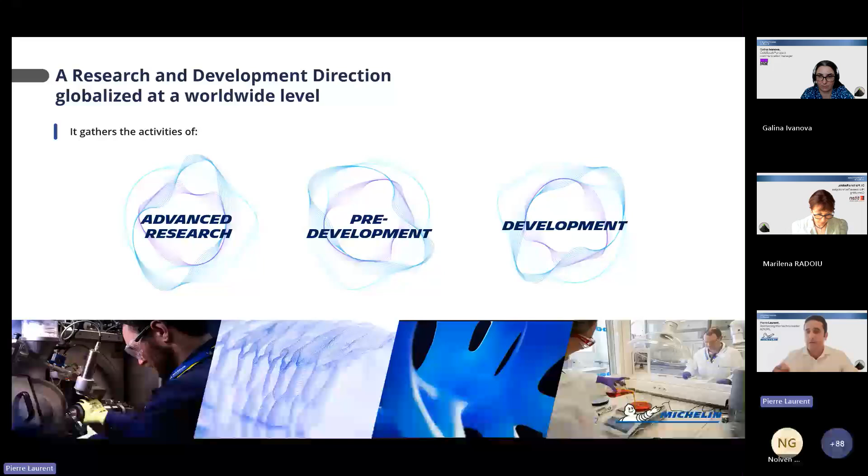The advanced research is mostly driven here in Clermont-Ferrand, in the center of France. Michelin is well known for its 130 years of innovations, and I want to highlight the two last ones, Totem and Demos tires, which contain a high renewable or recycled content of materials. That's one of the key focuses on my side in R&D: to develop new materials that will increase the renewable and recycled content of our tires while maintaining or even enhancing the performance of the products.

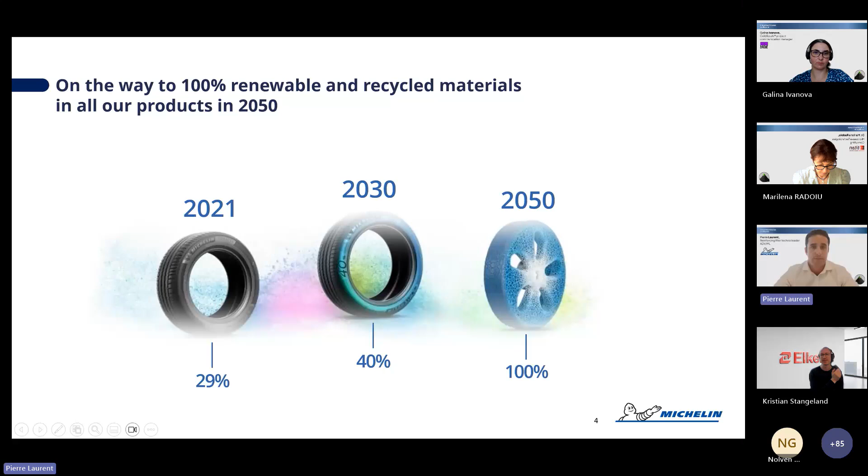We have a very short-term target, in 2030, to reach 40% of renewable and recycled materials. Today, I believe we are at 31%. The 2030 milestone at 40% is only a milestone; the final goal is 2050, where 100% of our materials will be sustainable or recycled. So that's the main target, and we are working in advanced research to develop and boost those technologies on the market and make them available to the community.

The recycled and renewable target is very important, and we have clear goals, but that's nothing without CO2 reduction goals also. Here we want to reduce scope 3 emissions, especially related to raw materials purchasing - today we are talking about carbon black. So we want to reduce the CO2 emissions coming from the purchase of those materials, and we have strong objectives of reductions, about 30% compared to 2019. So you understand that we will at some point need to switch from relatively CO2 intensive products to low CO2 intensive technologies.

Here I just want to give a few examples of renewable and recycled, and come back to the definitions that Michelin is using. A sustainable material is either renewable, meaning you can renew the feedstock within the lifetime of a human being - so let's say 80 to 100 years, that's the renewable part - or recycled means recycled, obviously.

We are not only targeting renewable or recycled material, but we are always looking at the life cycle assessment of the products we are developing. And in the life cycle assessment for tire applications, a huge part, about 80%, depending on the tires you're talking about, depends on the use phase of the tire. So when you have it on your car, on your truck, on the road. So the impact here will be the performance.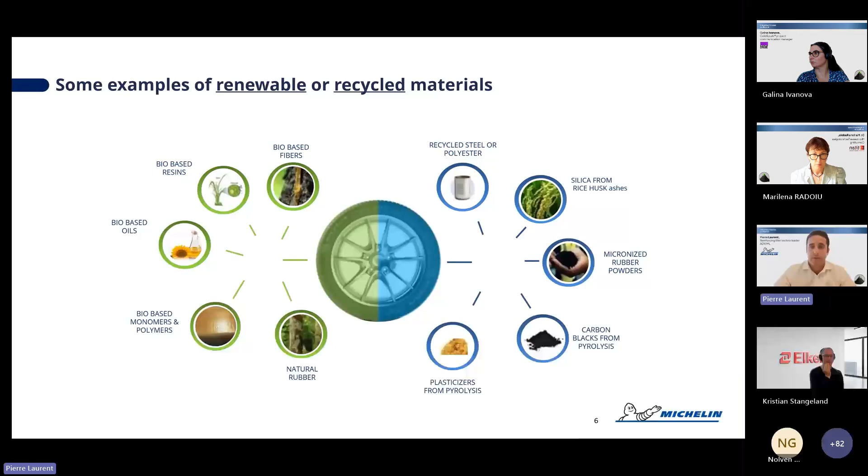We are not doing it only by ourselves. We are doing it with other companies, with startups, with well-established companies, and we also used to work in European projects such as Black Cycle. That was a key helper to develop the sustainable carbon black, so carbon black produced from tire pyrolysis oil, and also recovered carbon black, which is one key reinforcing filler that will bring sustainability and circularity to our tires. So we are not doing it alone, we are doing it with many different people, companies, projects, and that's the core of our open innovation strategy.

So why am I here today? I'm here today because we are talking about a carbon product that is black and that may look like a carbon black. So I just want to give you a few insights about what a carbon black is and why it's important to tires. A carbon black, as I hope you will learn during this presentation, is a highly engineered product that is about 25% of the weight of a tire. So it's a huge part of the tire. Reinforcing fillers today are mostly two main families, precipitated silica and carbon black. Carbon black remains the bigger volume.

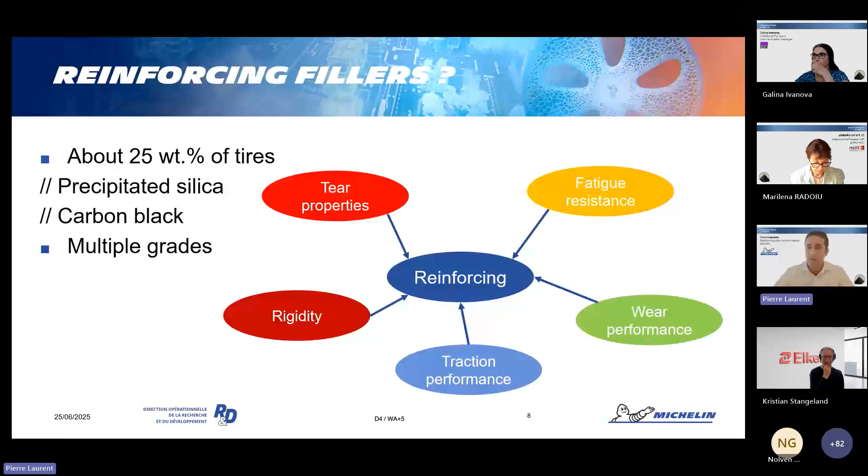So carbon black specifically is a highly engineered product. Again, it's not just small carbon dots. It's much more than this. And it's well defined by ASTM D1765, which defines the key characteristics of carbon black. Multiple grades, again, are available. In the ASTM norm, you have more than 40 grades, I believe. In a tire, you usually have more than 10 different grades, ranging from 10 to 150 square meters per gram. A few higher surface area grades also exist.

There are multiple grades because there are multiple tire parts and tire usages. You don't need the same reinforcing properties on the sidewall of the tire, on the tread, or on the inner liner. So each of those different parts of the tire usually requires a specific grade. Carbon black is a key product for the tire industry. Just to give you one number, about 75% of worldwide carbon black production goes into tires. For the rest, whatever is black around you should at some point contain some carbon black.

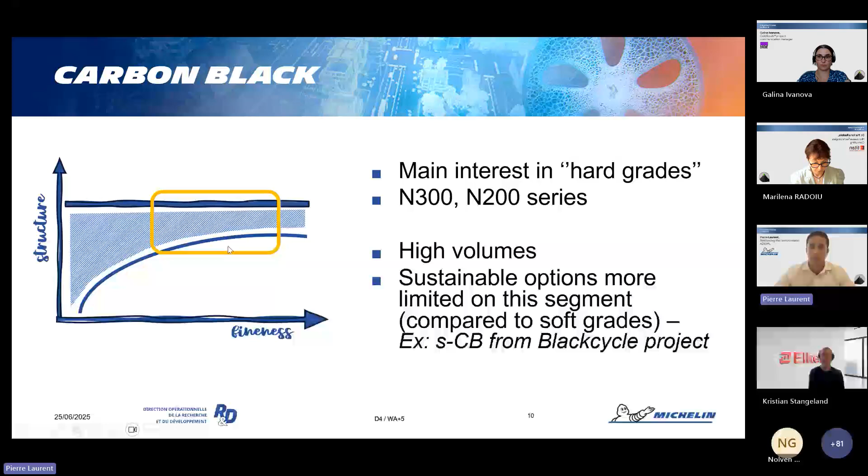Oops, sorry. So why plasma technology? Plasma technology to us, we would like to see it as a new way to produce carbon black, because carbon black, as you may know, is today produced by the furnace process. So it's a partial combustion of fossil feedstock. And when you are talking about partial combustion, you are talking about CO2 emissions in the end. And we believe the plasma technology can make a difference here. First, to reduce the impact because of the high yield, usually, of plasma pyrolysis technologies, and the low CO2 emissions associated to this high yield of feedstock conversion.

And why methane here? Because methane we could transfer to sustainable and renewable resources if you use biomethane, biogas, or, I think you talked about landfill gas, wastewater gas. There are multiple sources of renewable gas, and that will be key also for us to meet our sustainable objectives after 2030 probably, because we see this technology as a relatively long-term development technology.

So the major challenges for the methane splitting technology is first to meet the carbon black quality standards. Carbon black, again, I just want to be very clear, it's a highly engineered product. In the ASTM, you define maybe 80% of what is a carbon black grade, and then 20% remains either unknown or not so well understood. So developing carbon black grades is really a tough job, but we believe that with this technology, we could meet our requirements. Again, at Michelin at least, we need reinforcing grades, so over 80 square meter per gram. If you have low reinforcing grades, it may be interesting also, but the market and the impact you will have on our industry will be smaller.

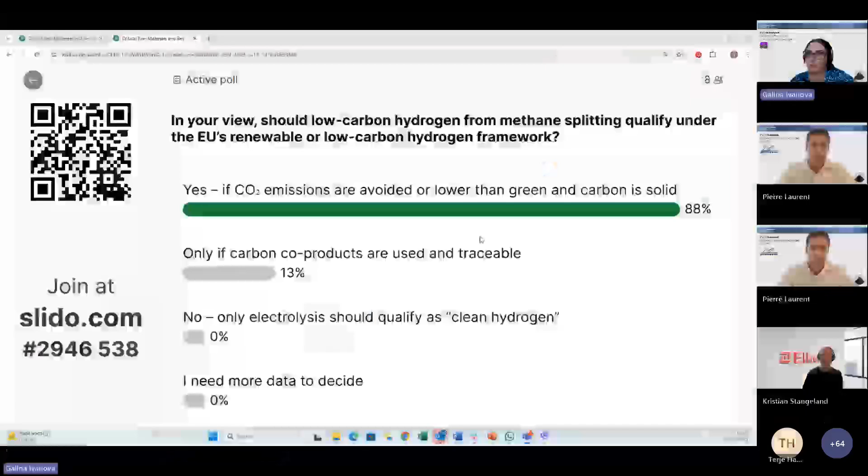Thank you so much, Pierre. This dialogue between us as project partners and industry is really very helpful and deserves a lot of attention because it's the actual application of our work. So a quick look to our active polls. Yes, our participants say that low carbon hydrogen from methane splitting should qualify under the EU's renewable or low carbon hydrogen framework. So I'm launching the next poll.

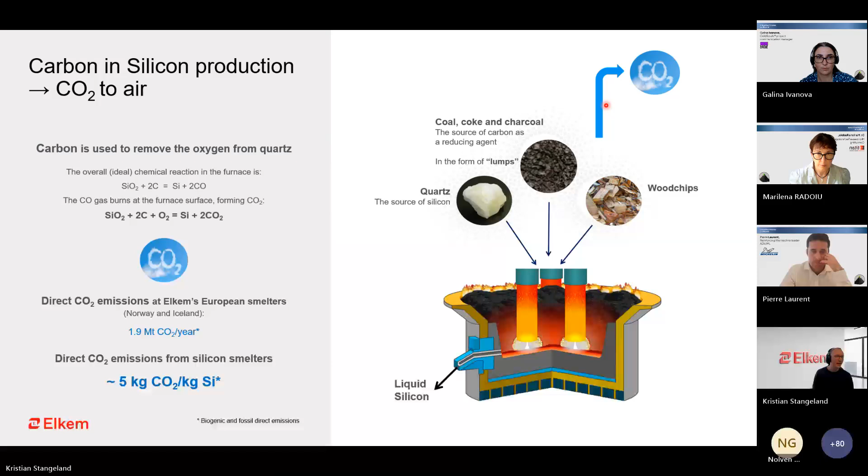So we have a few different pathways for reducing our CO2 emission. One of them would be to go for biocarbon materials. And there we foresee that the issue is the availability and also the cost. There's a lot of competition for the bioresources.

Another option is to continue using the current materials like coal and so on, and then combine it with CCS. But the problem there might be that when the producers of electricity, steel, and so on move away from coal, the small fraction that is coming to us might become very expensive and might not even be produced anymore. So then we need a new source of the carbon material. And that's where this methane splitting comes in.

So for this project we also received a Horizon Europe project last year, where we are trying to look at this concept both for the production of silicon, but also manganese, which is another metal that is quite hard to do anything about only using hydrogen.

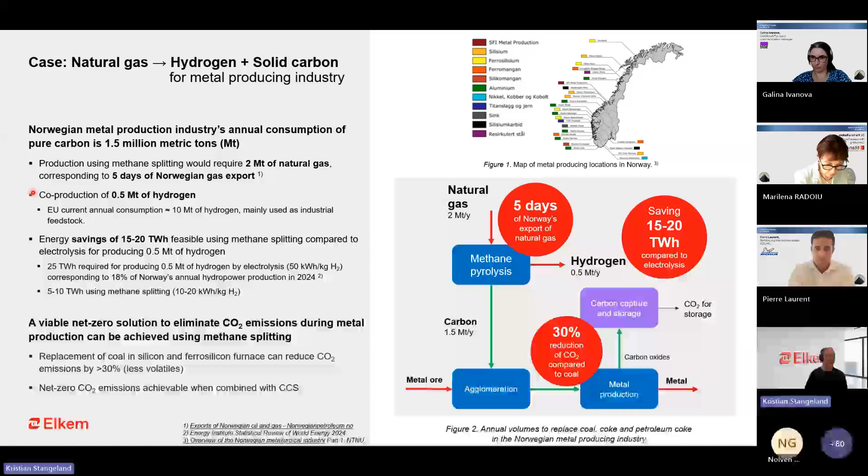So if we currently use around 1.5 million metric tons in this industry today, we would need around 2 million tons of natural gas. And that would only correspond to around 5 days of the Norwegian gas export. So it's not a huge amount. At the same time, we would co-produce around 500,000 tons of hydrogen. And the main thing we expect is that we have significant energy savings. So we think that you would save around 15 to 20 terawatt hours for the production of this amount of hydrogen if you use methane splitting instead.

So in this scenario, I guess the methane splitting would be like an external company that provides us a carbon material that we then take into our process. And we could also reach carbon neutrality using this approach if we combine it with CCS, but just replacing coal or the current materials with something from methane splitting would already reduce our emissions by about 30%.

So overall, then, we have two scenarios where we foresee that methane splitting could be a part of our process. One of them would be, as I mentioned, as the external carbon supplier. The other one would be that they are part as a technology provider in developing this concept.

So we don't really have any very strict carbon requirements in terms of carbon black or the structure and these things. But it's very important that there are very low levels of impurities. So in terms of iron or nickel or most of the other types of metals, it's very strict requirements. Some exceptions maybe to aluminum and calcium that we could theoretically refine out.

It would be okay if the carbon was easy to handle in the agglomeration step, but I think most carbon black that is produced today, they have some kind of process to make it into something that we are able to use. So we already have some qualification programs for taking different carbon blacks, taking it into the agglomeration step, and then seeing how it does in the process.

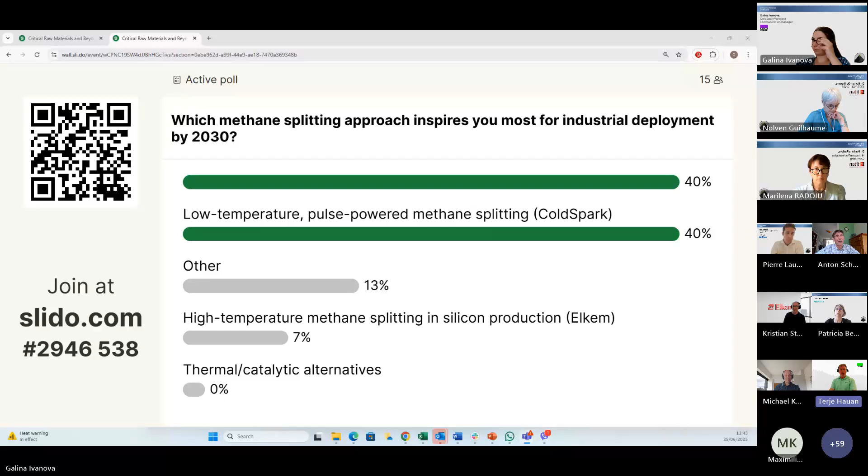Couldn't integrated or hybrid methane splitting hubs combining these technologies be the most effective route forward? Location perhaps could be important, or it could be that we all combine forces. What do you think? If I can start with that one, first of all, I would say location is key, because it's about access to either biogas or natural gas, and that should be low carbon variants. And Norway, with the vast natural gas resources, is of course a good location. The second part is that Norway, along with Sweden and France, is favorable when it comes to electricity. So location should be key here.

And then from our side, we are a commercial industrial company. So we are looking to industrialize a number of other EU projects. They can bring the knowledge aboard, they can bring the expertise on board, but maybe they don't have the same drive in terms of making an industrial project, which is what Pierre is looking for, an industrial project, not a science project. Same goes for Kristian as well. So I think working together is smart, and using these events is a very good way of finding each other and saying, let's do something smart together. But location is important, as you mentioned, Michael. Mm-hmm.

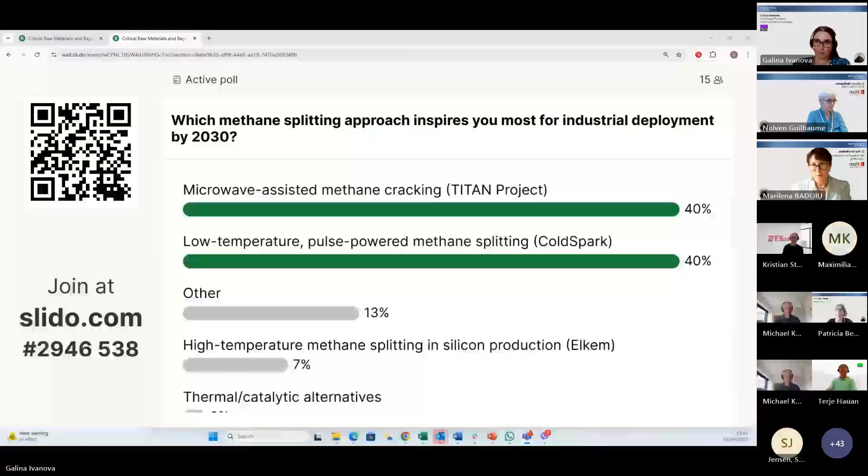Yes, it's a very good point, combining and using these technologies smartly. I believe we all are participants in the same European Union call, and at the end of this call, wouldn't it probably be a good idea to get together. We all have to reach a TRL 5 at the end of the project, so we have to fill in our reports. But it's a good approach to say what's best from each technology, because I always believe in combining. In our technology, we already combine two things: catalytic technology and microwaves, which we apply to enhance catalytic action. Why not use something different together as well? So I totally agree with this approach, it's a good approach to combine the technologies.

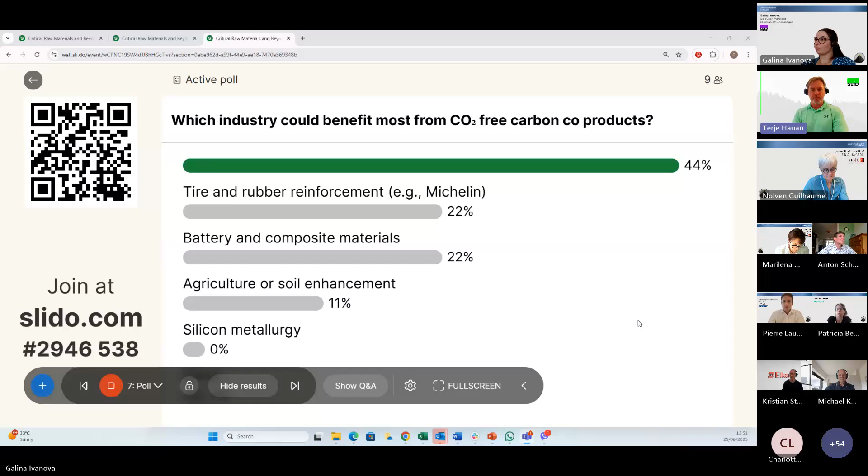A quick comment there. Maximilian was with us earlier representing Hydrogen Europe, and I also had a chat with Jorgo, the CEO of Hydrogen Europe, the other day. It's very clear that Hydrogen Europe is agnostic and open to this, saying we need somebody driving hydrogen if we are going to use it. If everything needs to wait on green hydrogen or electrolyzers, it's going to take time. So we need to be agnostic, if we have sources to make something better than green hydrogen but the policy document is stopping us today, then somebody needs to check their science books in Brussels, and that's very important. I think Hydrogen Europe is one of the players that can help the methane splitting industry, whatever version of methane splitting, get the attention from Brussels to understand that this technology shift or green transition needs to include methane splitting as part of it. I think the opening from the Critical Raw Materials Act is like the first time the door has been opened to the union. So now I think they will actually see some traction on this, saying methane splitting needs to be evaluated at the same level as green hydrogen, measured on the same basis, which is carbon intensity per kilogram of hydrogen.

I see another hand raised but I can't identify who it is. Augustine, mic is enabled. In the meantime, a quick look at the poll: our participants expect that steel and construction would benefit most, followed by rubber reinforcement and batteries. I'm launching the next poll in the meantime, and if there are some comments, so is there any more comments or contributions from the audience?

Okay, this is our last question: what is the most important factor when comparing hydrogen production technologies? So it's open, and it is our last one. It looks like everything is important.